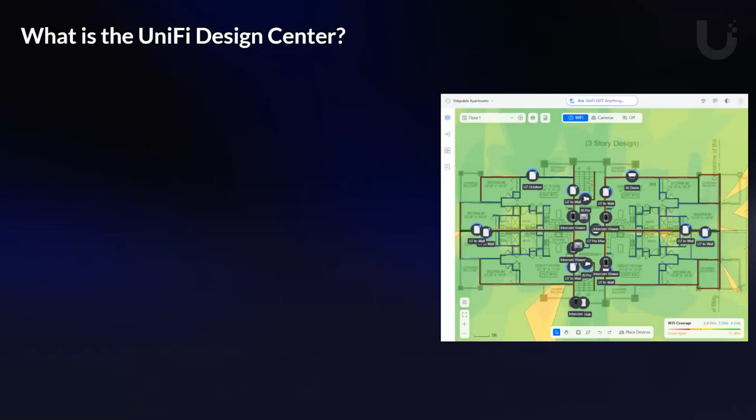So let's move on now. Design Center - what is the Design Center? It's a really powerful solution that allows you to do a lot of different things. The big thing you'll be doing here is designing your UniFi deployments, including the categories we mentioned, like UniFi Network with access points, switches, gateways, UniFi Protect with our cameras, UniFi Access with our door access control solution, and so on.

All of our products you can place and design on a floor plan to get an idea of what to expect before you deploy them. This allows you to simulate device performance and coverage on a real floor plan.

This is a great opportunity whenever you're getting ready to do a new deployment with UniFi and trying to decide between different units. Take a look at the floor plan, see how a different access point model affects your coverage, see what it looks like to have a 10 gig LAN infrastructure as opposed to a 2.5 gig. Try these different things out, test them out.

You can use this tool to get an idea of how it's going to work out. You can also visualize things like camera angles, which we'll show you in a little bit, and that sort of thing. You can build a bill of materials for your customer deployments or for your own deployments.

You can take that bill of materials, go to FlyTech and say, hey, we want to order these products - what of these do you have in stock? Do you have any alternatives for those you don't have in stock? You can provide that to them.

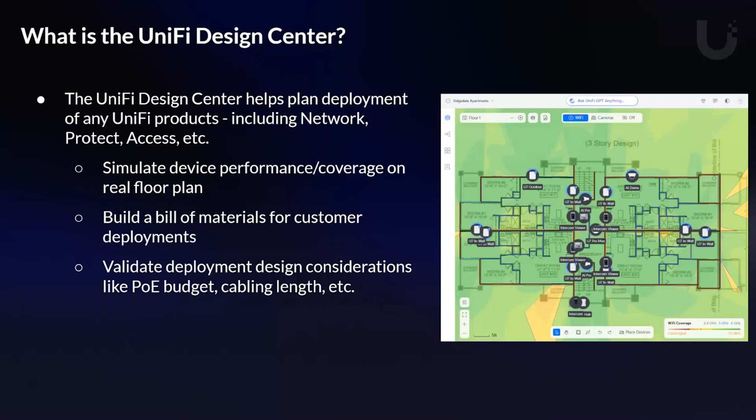You can also validate deployment concerns, like whether you have enough PoE budget for all your devices. We automatically check that through this product, and it's a good way for you to get a sanity check. A lot of times that's what people want from my pre-sales assistance - to just take a look over a deployment and make sure it's going to work out all right. What's great about this tool is it allows you to do that automatically with its help.

You can also generate your own sales proposal. There's an option to export a PDF where you can take this and give it to a customer, show them - or maybe if it's for your home, present it to your wife or husband to get approval for the deployment.

This nicely outlines what the deployment's going to look like topology-wise, the ports that are going to be plugged into what. It gives you lots of information - in just 15 minutes you can generate a full sales report with all the bill of materials, a generated topology, simulated coverage, and all of that with your own branding on it.

It's pretty amazing - you can do that in like 15 minutes at no cost. That's just a good way for you to show you're doing your due diligence to your customers. So I think if you use the Design Center, I'm confident you'll have better success at selling UniFi products, whoever it is you're selling to.

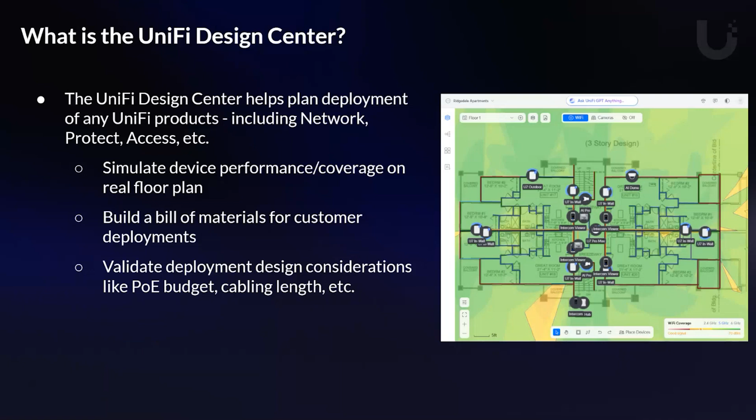So let's go on. Let's talk about how to get started. If you guys want to follow along, I'm going to be going through a demo in a minute, but I'll do a few slides first to show you the different capabilities, and then we'll do our own real-time Design Center deployment example.

If you go to design.ui.com, that's where the Design Center is, and you can log in with your Ubiquiti account. What's cool about this is you can actually use it for collaboration.

If you have colleagues at your company that you work together with on UniFi deployments, you can invite them to each project as a collaborator. You can share these floor plans with your customer, and they can make changes to this proposed layout and update you that way. It's really geared towards collaboration, and we want you to use it however you need to be successful.

If you start at the Design Center, design.ui.com, you can save your designs and keep everything that you're working on. So even if you close out of the window or forget what you're working on, like I always do when I get too many tabs and forget where I'm at, your design will save automatically and keep going. So when you need to come back to it tomorrow, it's there and waiting for you.

We know there's a huge range of office deployments. You might be a small business with 5 employees, or an office deployment with 500 employees. UniFi can handle all of that, no problem. But each of these deployments is going to look quite a bit different, and so these templates are just basic examples that show you what you could use. Of course, you can feel free to start with that and modify it to your heart's content, do whatever you want to shape it to your needs.

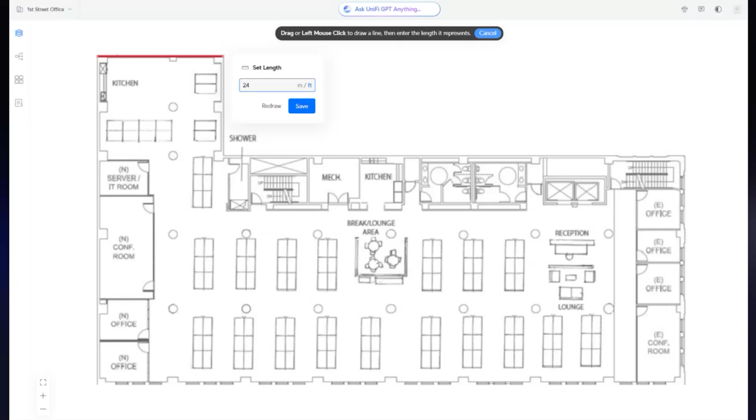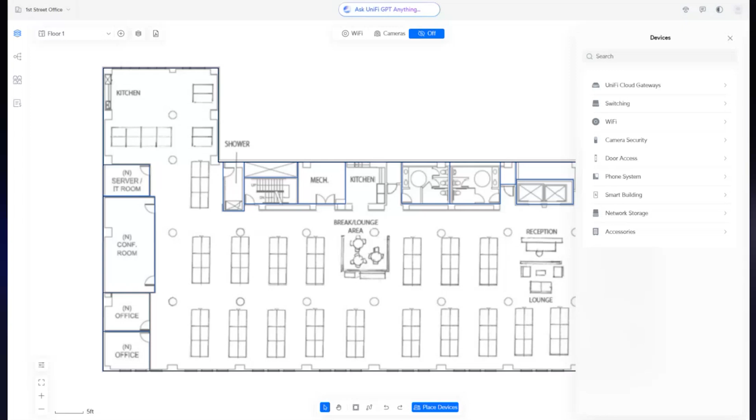So once you've done that, you can draw your walls. In this case, I went ahead and drew concrete walls throughout the exterior of the building. Then we have this feature where you can draw individual rooms. It's really quick. I did this in about a minute and a half to draw the walls I'd need on a floor plan. Once you get the hang of it, it's very simple and easy to do. I'll show you how it works in real time.

Once we've drawn those walls, you can see here I can place the access points. Based on the materials we specify these walls are made of—typically in a US environment, which I think most people are representing based on time zone—most interior rooms are made up of drywall, and exterior can vary: sometimes stone, sometimes concrete, sometimes brick. We've got the ability to draw the walls and specify the materials so it actually simulates how much signal will be lost through each of these different materials.

So if you have large concrete pillars inside a deployment, like in a museum, you can draw those, indicate they're concrete, and get an actual simulated effect of how much that's blocking signal for the access points on one side. What does it do to the signal on the other side? We simulate that, so be as precise as you can with the composition materials.

Things like doors—doors are wood, and wood and drywall typically have a pretty similar impact on Wi-Fi, a very marginal difference. So a lot of times, if you're worried about drawing every single door in wood, don't worry about that. The other thing is, if you're going to have exterior coverage outside the building, you can draw the windows there. But in a lot of cases that's not worth it if you're not focused on that outdoor area. So if you're not worried about outdoor coverage, just draw the walls and ignore the windows. But you can always add that if you want more precision.

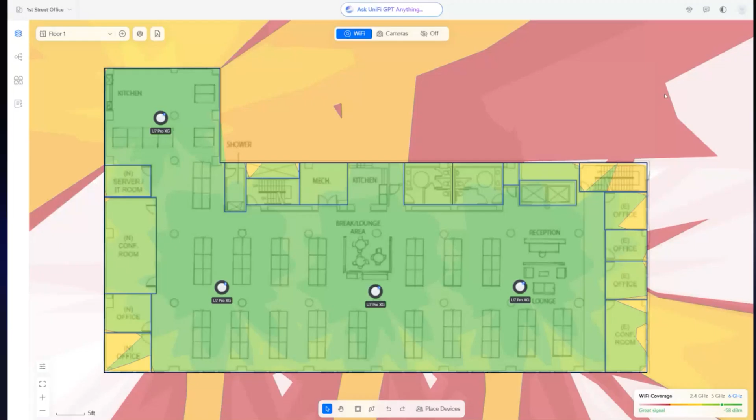We can also draw. A cool thing about this, you can actually use this tool to help simulate and estimate the cable length. This is an important consideration when you're deploying in like a larger deployment. Area wise, sometimes you have to consider that there's a maximum cable length depending on which PoE that you're using and everything. There's a maximum cable length that you need to make sure that your device is, you're not wiring too far from a PoE port.

That's not going to work. You need to make sure that you know what the limits are based on the PoE type and everything. But you can actually estimate your cable lengths, and you can also estimate how much cable you need if you're going to be running all new cables for new construction. You can use this tool to automatically draw cable connections from the switch rack all the way to all the different devices where they're mounted.

The cool thing is you can draw on this. You can select, if you go click draw cables, it's that little icon on the bottom. It looks like a little connector with 2 different nodes on it. That you can draw cable routes, which, let's say where the conduit is through your building. Some floor plans will show that. So if you have that information, make sure that you put that onto your floor plan.

Make sure it's accurate. This obviously isn't what it's going to look like in real life, but once you've drawn this conduit, you know what the conduit looks like. You can then go ahead and auto draw the cables, and it will automatically, using that conduit to route the cables through, tie every cable in and provide an estimated cable length from that switch rack all the way to that access point or to that camera. Really nice feature, and it allows you to estimate how much cabling you're going to need.

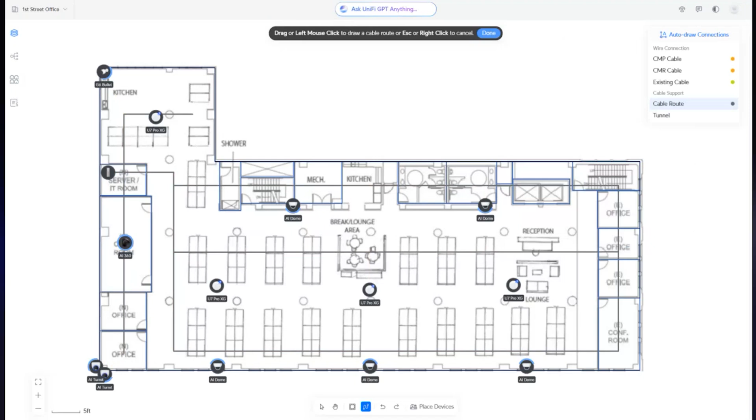Let me show you what it looks like once you've done auto draw. You can click that auto draw with connections button in the top right, and then it automatically draws that connection from that center server rack that I placed, and through all that conduit, it's drawing all the cables from each of those devices back to the switch. You can see here what the run is for each one of these down to the foot. I've got 107 foot from this U7 Pro XG all the way back to the switch. This is a great way for you to get a better estimate of how much cable you're going to need. Like if you're just guessing, it's going to be tough to guess that.

I do recommend calculating that and having a good understanding, but also know there needs to be some room for error, because in every real world environment there's going to be logistical issues, maybe something obstructing the cable where you have to route it around something to conceal it, and that adds some length. So just use this as a baseline and be conservative, get enough cabling.

So you don't get to site and cable everything, then realize you're short by a few hundred feet. But yeah, that's a really nice resource this tool provides. You do the auto draw, and it's going to save you a lot of time versus actually manually clicking and connecting it all.

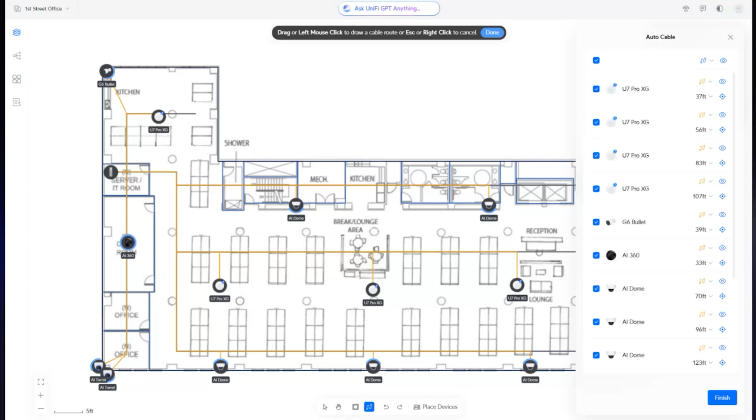Now, like I mentioned, you can actually place a rack cabinet on your floor plan. So in this case, there's an actual server IT room on this office floor plan. I can place the rack there, specify what size rack it is, and fill it up with all the different UniFi devices I'm going to be deploying, even down to having Keystone patch panels there to help visualize what this looks like.

What's cool about this - let's say you're planning a deployment as part of your MSP business, but you have an installer doing the job for you, maybe a new installer you're working with, and you want to make sure they understand your vision. Instead of describing this all, you can send an installer link that provides them an actual display of the rack, including which port goes to which device, and everything an installer needs to make sure everything goes to plan when they're on site. This is a really nice resource and something I do recommend you take advantage of.

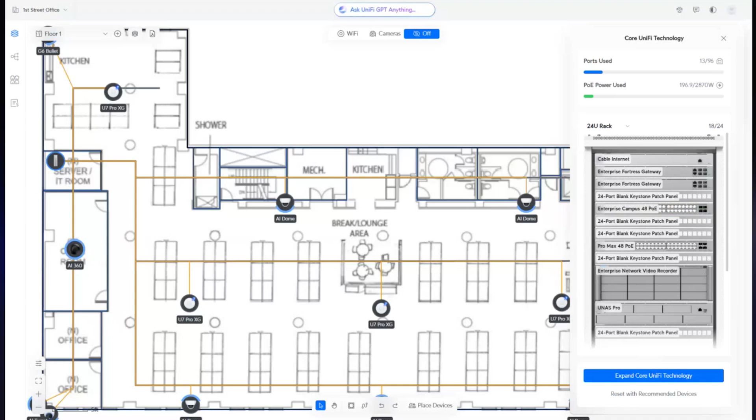Now, we also generate a topology as part of this. So you can automatically generate topologies when you're drawing your devices. As you're placing devices, you can actually adjust the topology to make sure all the cables are plugged into the right port and everything - you can adjust this after the fact. Where this is a really nice thing is if you're going to give that installer link, you see there in the top left, share installer link.

It allows me to enter an email address of an installer. It then will provide them that list of all the ports and which go into each device. And if I've fine-tuned that to make sure every port's what I want it to be, then we have a reasonable expectation that we can achieve that. And when you need to go on site in the future to service it, you can have some confidence that they'll have installed it properly based on the plans. This is a great resource to help facilitate that communication.

Like I said, here you can go into the devices and change the ports here. So what I did here is automatic, but sometimes it's not going to be perfect. It's not always going to recognize that a 10 gig interface device, like our U7 Pro XG, has a 10 gigabit Ethernet interface on it, and this Enterprise Campus 48 switch has a mixture of 2.5 gig ports and 10 gig ports.

Now, automatically, if I just auto draw it, it might not always put them on the 10 gig switch ports, but you can adjust that here on this view. Click on the port next to the device and change it to one of the 10 gig ports. As you can see here, those 4 ports in the middle are the 10 gig ports it's connected to, and this allows you to specify exactly which SFP port you want connected to which switch and so on.

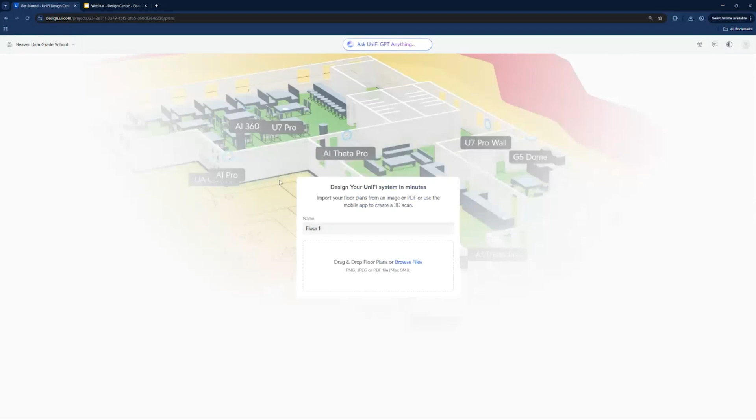And so this takes us to this screen where I can upload a floor plan. I'm gonna go ahead and upload the floor plan that I found today just Googling floor plans, and I'm gonna use this as a starting point. So this is not a perfect floor plan. Of course, I would recommend getting something that's more accurate, feasibly. Looks like this was maybe drawn over a physical map, but it works for what we're going to do today.

So what I mentioned today, if we know the dimensions of one of the walls, so let's say we know that this wall here is 50 feet, we can go ahead and draw that scale, and now we can see there the scale listed, so we can get an idea of what's the distance between each location.

Now, once I've done that, the next step would be going ahead and drawing the walls. I'll click down here on the Draw Walls button, and let's just say that the school is all concrete exterior. You can see here the effect that this has on the signal strength, so this is going to cause a degradation of the signal. Concrete is the hardest to penetrate. However thick that concrete is going to influence this, but this is our base estimate based on real world uses.

But what we'll do now is we can go ahead and draw. Now we have two options when we do walls: we can either draw an individual wall or we can do a room. If you have a lot of individual rooms, this is a good way to go, especially for interior walls. When you have something that doesn't really just follow a box format, I recommend just doing individual walls this way. So we can start by drawing these walls.

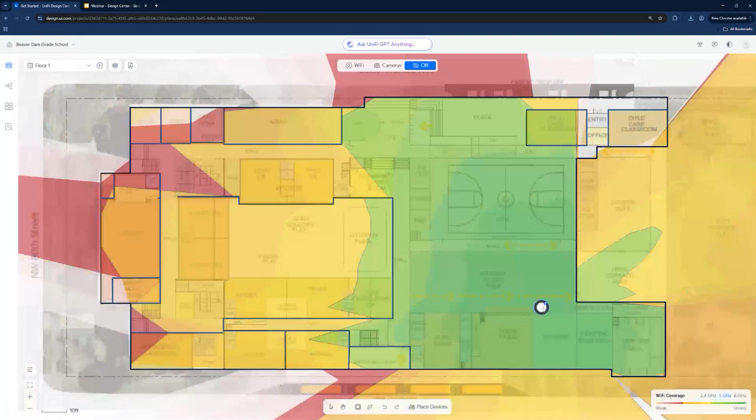Let's go ahead and start placing access points here. You can see this is based on 5 gigahertz. If I switch to 6 gigahertz - let's go to Wi-Fi and change it - we can get an idea of how these devices perform differently.

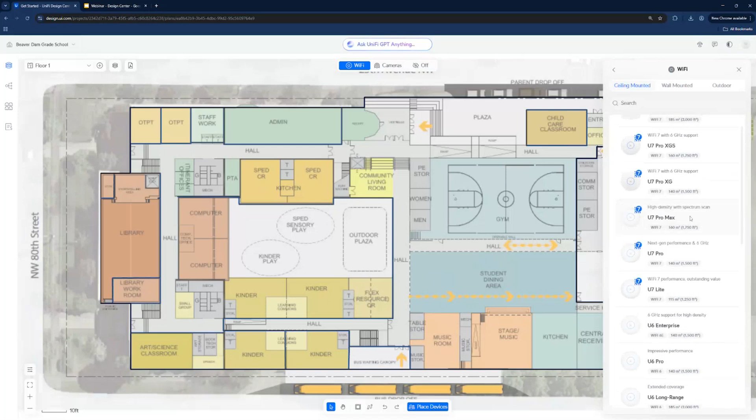Let's place, as an example, one of our older access points. It doesn't have 6 gigahertz, so it's not going to show up anything on 6 gigahertz, right? For our products that do support 6 gigahertz, like our E7, these actually support longer range coverage, but you can compare that to our U7 Pro for what you'd need for a school this size.

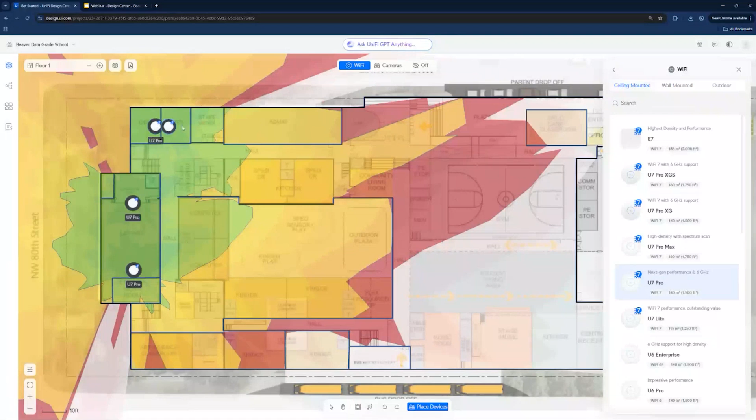In this case, maybe for the library we'd want 2 access points, depending on how many students will be there. You can use this to get an idea of how many access points you need as a baseline, and then if you get on site, have room in your budget for a few additional access points to fill in areas with weaker coverage.

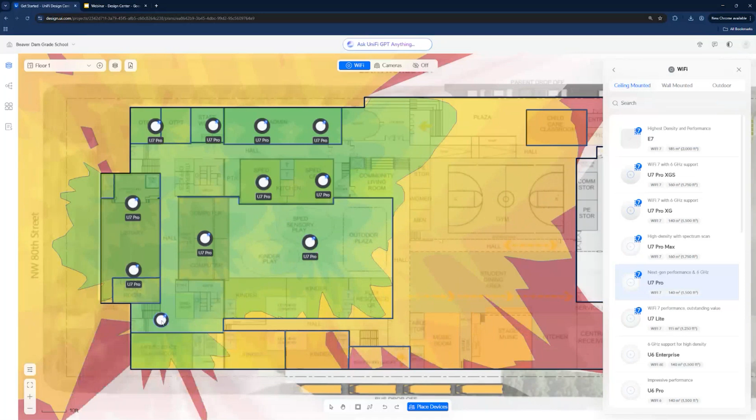Even for a larger school, it scales pretty well. I don't have all the walls drawn, but there's not a whole lot of interference from drywall only - you will definitely see that with concrete. Look at that when I put it right on the other side of that wall - look how little signal is coming through that concrete.

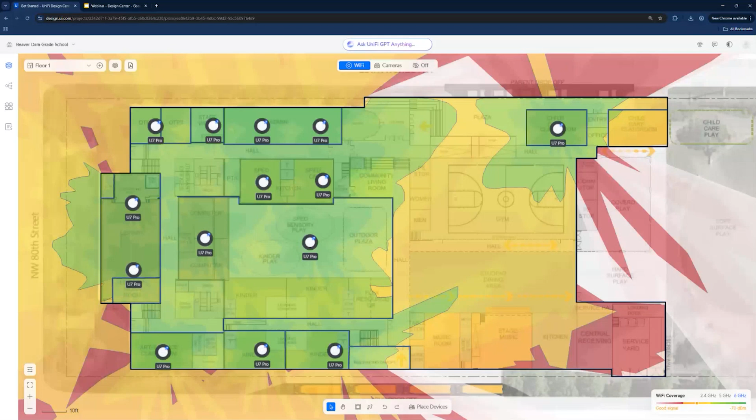If you want to see the scale, you can highlight each of these areas and it will show on the meter what the signal strength is actually like. Minus 70 dBm is still good enough for a connection, but we recommend designing generally around green signals, especially for 6 gigahertz, since coverage also depends on the client device and how strong it's able to transmit. That's how we can quickly place devices and get an idea of how many APs we need.

So if we want to see how many we need for this whole deployment, let's keep going through here. Maybe we don't need to worry about the gym area, because no one needs to be on their phone while playing basketball.

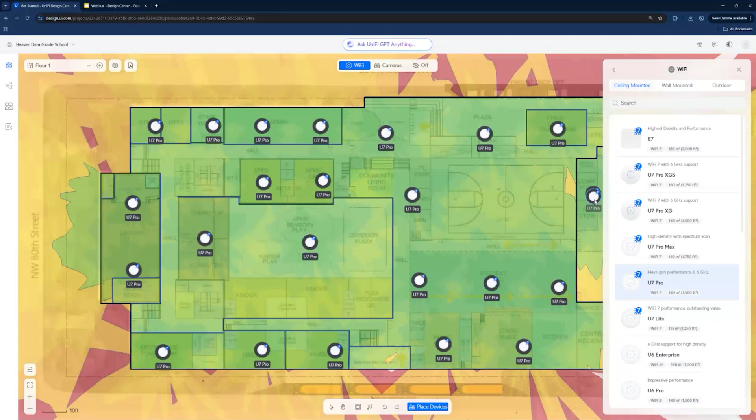All right, so we won't prioritize that. But you can get a pretty good idea of how many access points you need, and then use this as a base bill of materials that you can modify based on real life conditions.

Let me show you an example of how the E7 does long range 6 gigahertz. You can see here how much more coverage you get from using the E7 with 6 gigahertz, because it supports the longer range 6 gigahertz, making it more similar to 5 gigahertz in coverage. Normally 6 gigahertz coverage is smaller.

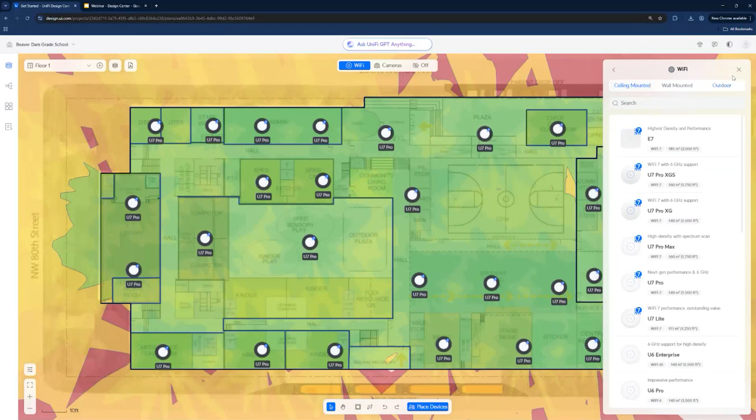But let's look at 5 gigahertz. You can see here there's definitely plenty of signal. And 2.4 gigahertz is going to be pretty noisy. Like I mentioned earlier, I recommend for a school like this that you disable 2.4 on at least half of the APs, if not more, maybe two thirds of them. You want to make sure there's good enough quality and minimal interference so devices can still connect, while prioritizing 5 or 6 gigahertz for all the laptops and the more recent and current client devices.

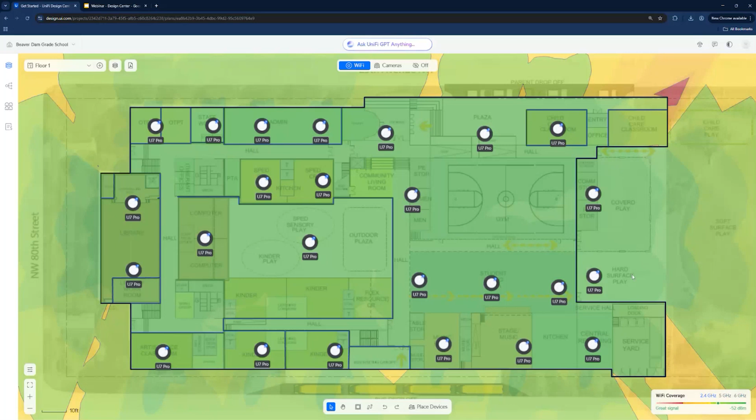All right, so that's the Wi-Fi. Now let me show you how the cameras work here too. This is a cool thing that we can do. If you're planning on deploying cameras and want to see what the different coverage would be like for each of the camera models, you can look through all of our cameras.

Now we've got them separated into bullet form factor, which you'll recognize here. We just released the G6 Bullet, which is a good scalable 4K camera with AI and everything on it. It's a good value for a school. If you're going to have a lot of cameras, it's going to be a pretty good price point.

But think about the hallways here, what device you want deployed in the hallways and how you want them deployed. A lot of times people will deploy something like this when they need more coverage, or when they'll want a wider angle lens, like our AI 360.

You can see here it covers a pretty large area, like somewhere like a gym or something like that. So that's a pretty high coverage.

Whereas let's go with the AI dome. What this is going to do is, within that angle, it's going to provide coverage of all this. But you can see here it only goes as far as the walls. So you draw these walls on the floor plan and you get a really good estimate of what the coverage is going to look like and how many of these you're going to need.

But for the outdoor, you can see here we can place these devices outdoors, and these are weatherproof and so on. So we can use the G6 turrets if we want to have these for the exterior of the building.

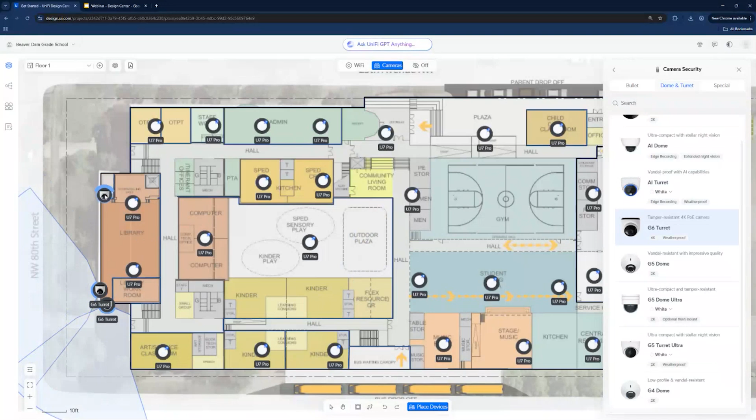You can also see how we sell different mounts where you have these mounted back to back, where you can have two of them mounted like this. Then you get more coverage, and it's just as simple as adjusting it this way to change the orientation of that camera. By having two of these mounted next to each other with different facing directions, you get full coverage of everything going on out there.

So just check out the different camera options that are there and get a feel for how each one of these works. Like the G4 PTZ Industrial is going to have a lot of coverage. It has 22x zoom too, so in reality it's going to depend on where it's pointed. It's not going to be able to point at everything at one time, but you can point it in any direction, and it's able to do and follow movement and things like that.

But we have all our models there. Now if we select Wi-Fi, we can switch seamlessly to cameras. And when we have the walls drawn here, for the indoor models, I recommend using in a school or something like this a good example that's really scalable and cost effective, which would be these Dome Ultras. They're small devices, and they cost $129 each.

So it's a good, cost-effective solution for a larger deployment. In all your hallways, periodically you have one of these facing opposite directions every so often, and that will provide full coverage of the whole facility. But yeah, that's how you use the camera overview.

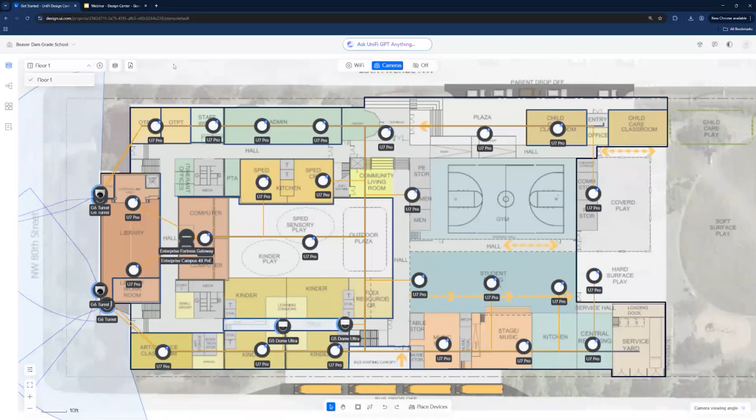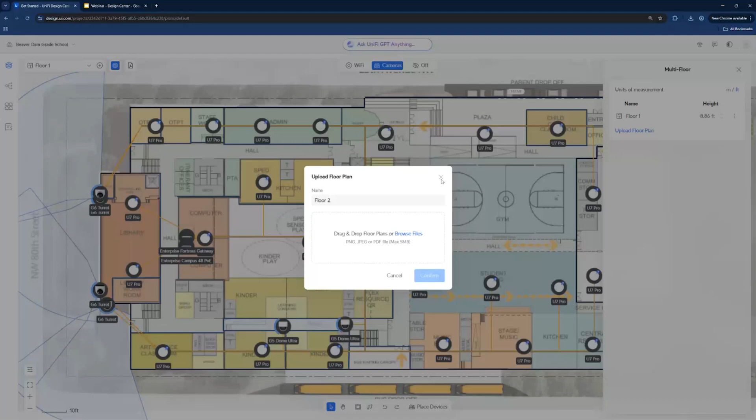And then we mentioned multi-floor. All we have to do for multi-floors is go ahead—you see where it says the multi-floor button here—you can just go ahead and add another floor. You can actually duplicate, for some apartments. Sometimes you're going to have an apartment layout—let me show you an example. This apartment layout, you might have all the floors be the same layout, in which case you can just duplicate and go in between the floors here to each of the different floors.

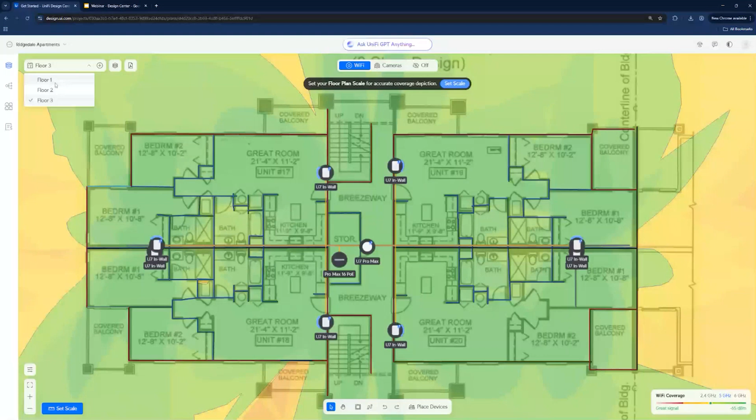And that's how you get to manage the multi-floors. You can specify the roof height, which in the past we had tied to the actual coverage, because of course you're mounted at a certain height. This is something you're going to consider right now. If you're deploying this in a warehouse and your AP is mounted 40 feet up in the air, it's going to be a different coverage than if it's mounted 8 feet in the air. So you need to make sure you're adjusting this.

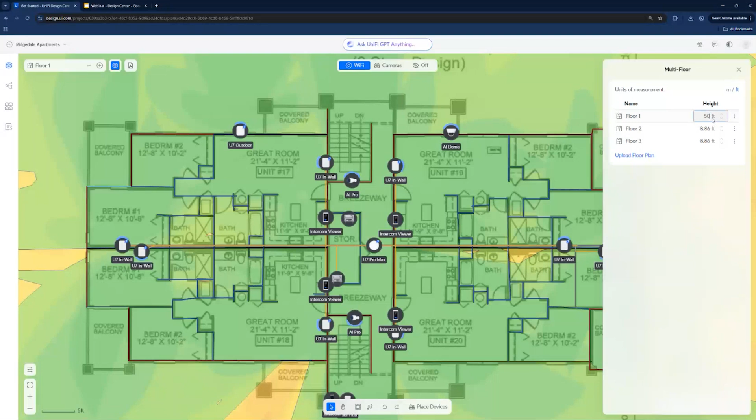I think previously it worked like this, but we'll have this in the future to where it's going to adjust. You can see it does adjust somewhat based on this. I think you can see there are some adjustments made there, but there's some improvements that could still be needed, maybe it needs to be a little more accurate. In any case, just make sure to check this when you're adjusting height. It does look like it's working properly, so maybe they already fixed it.

You can change the ceiling height, and that's going to change and impact the coverage of the devices. But when you're doing a warehouse, just make sure to think about that, how it's going to impact things if you're mounting really high in the air, and make sure to double check that information.

But here you can specify the height of every floor and how tall it is. And then from the topology view, you can see this has got all the floors. Currently I think you can go into the port view, and then make adjustments here between these devices. But I don't think right now, to answer your question about multi-floor, it's currently functional automatically yet. It looks like we need to improve that, but hopefully we'll have some fixes on that in the near future.

But we're adding a ton of stuff here. We've got some really cool things coming in the future too. So we just added the share installer link here.

We're going to be adding the ability to basically simulate a deployment too. We're going to be bringing a demo simulator. I don't know if any of you guys remember when we used to have demo.ui.com. I loved that website, it was really cool. We had an actual sandbox environment where you could test out the software experience. We're working on putting together an ability to simulate individual designs in a software experience, so you get an idea of what the software would be like to manage it from what you've put into the design tool. So look for something like that in the future. We're working on that, and hopefully we'll have something there before too long.

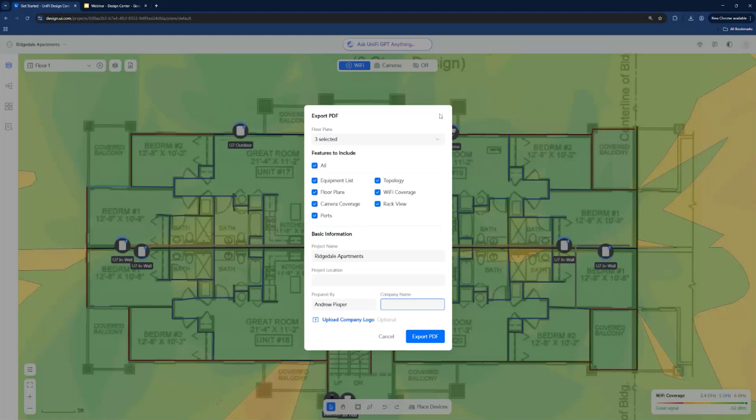I expect it will in the future, but there you go. Cool, I think that provides a pretty good overview.

What I mentioned before is you can actually put any of our products out there, including our UNAS Pro, which is our network storage device. We have things like EV stations, you can go ahead and place these EV station chargers out in a parking lot if you want to, and connect those back to the switches.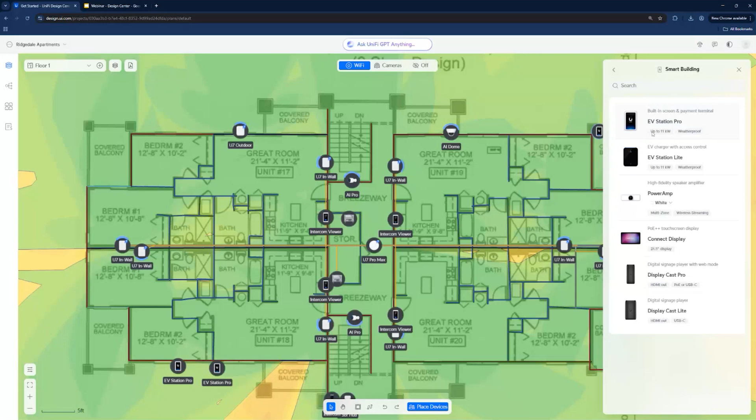What's cool about the rack view here, like I mentioned earlier, is this does provide a check on your PoE power to make sure you have enough to connect all these devices. It's a nice way to do a sanity check, making sure you're not exceeding the amount of power your devices require. And we'll give you an indicator if you do exceed that.

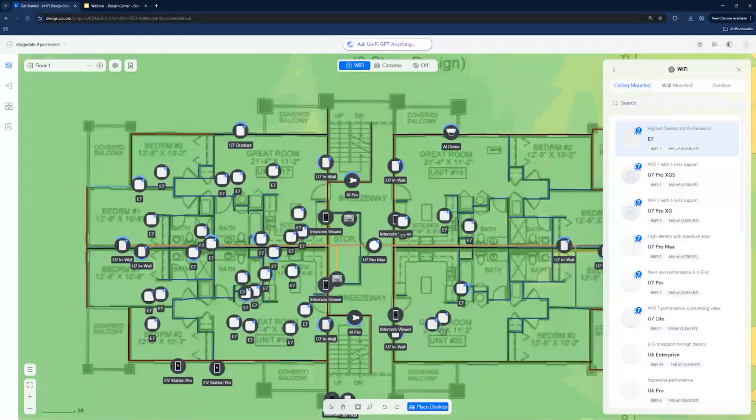So if I go place, let's see what I have here, let's go ahead and start placing a bunch of devices. This stuff can handle a pretty good scale here, so we're taxing it a little bit right now. Let's see what we can do.

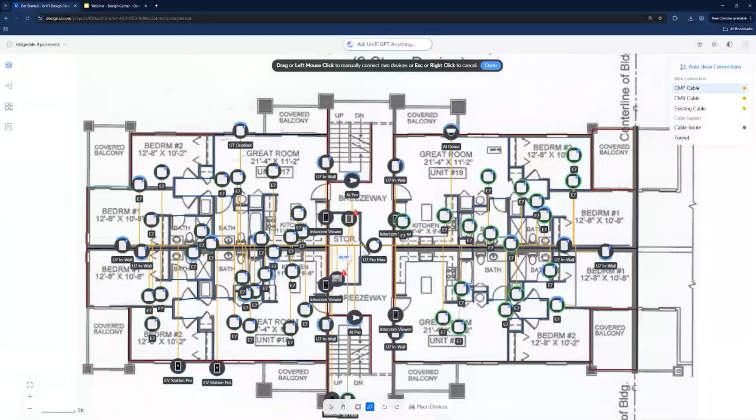Let's go ahead and do auto draw the cables. And you see here now we've got an error indicator, you've exceeded the power output on this rack. So I'm going to select back here, and I can go ahead and get more information. I click select on the info here, and you can see I'm at 1249 watts used out of 760 available wattage.

So that's going to help you troubleshoot an issue. What that would mean for me is I need to change my switch model to be able to support all of that. So let's go ahead and switch this out.

Let's throw in a few, provide some other products here, the whole list of them. In this case, you can see the wattage here, so if we need more wattage, there we go, we add that, and now we're within our wattage allocation because it can handle quite a bit of power. But there you go, that's our design tool.

Any questions for me now that we're in this? I'm happy to answer any other questions that you have.

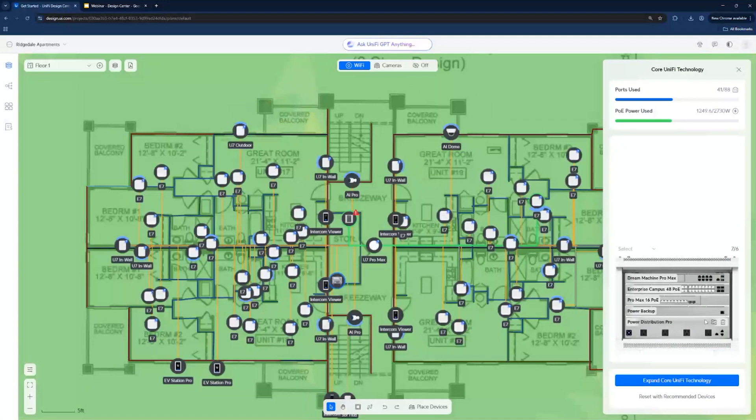Somebody asked if you can put a UNVR in the design center, Andrew. Yes, you can. What you'll do is go in here to the rack, go into your settings, and now I'm going to change this to be a 42U rack because then I'll have a lot more room, and I can go ahead and add a device. Go to network video recorder, and then I've got our UNVR, the NVR Pro, or the ENVR there. You see, I can go ahead and add that in.

Somebody is saying, I would like to have, I guess it's a future request, when you export the document to have the devices with numbers on it or the name you change it to. When I export it, it only shows the devices without the names. Can you do that, maybe for the future?

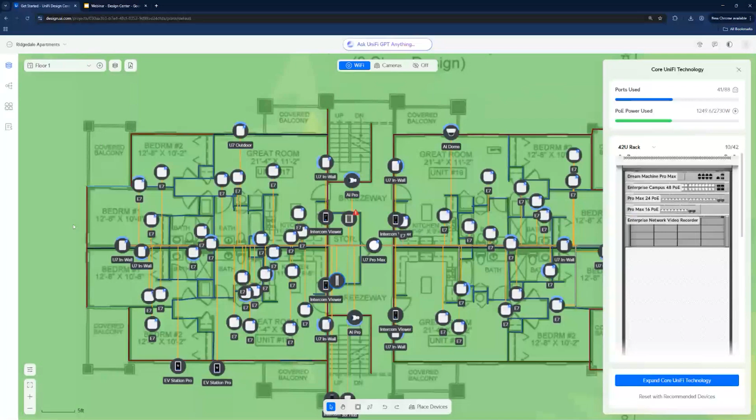Yeah, I'll note that. I do know you can use ports right here, but it's not quite the same. You want some sort of indicator or custom name that you can put on the device, like when you rename it here, you want it to show up as that in the export. I'll take your word that it's not showing up in the export, and I'll pass this off directly as a fix to our devs following our call today.

Okay, here's another interesting question. Is it generally better to install smaller access points and more of them, or a larger one and less quantity? That's a great question, every deployment is different. Wi-Fi is kind of my main area of expertise, so I'm glad you asked me a question about wireless. But basically, I think it depends on the application, and it also depends on what we talked about earlier, if we're talking about which Wi-Fi band these clients are relying on.

Let's take, for example, the warehouses I mentioned earlier. A lot of warehouses are very unique RF environments, very different than deploying in an office building. Because what's different about a warehouse is you have really high roofs or a high ceiling, long shelving, a lot of times 20-foot shelving, densely packed materials that can create more interference.

So a lot of times we design, and this gives you a unique kind of layout where people deploy access points with directional antennas that are specified. We offer APs with external antenna connectors, so if you're mounting at the ceiling, you can get an antenna with exactly the narrow beam width you want to fit down those aisles, long and skinny, and mount it there. That reaches through the aisle without bouncing off the shelving units like an omnidirectional would, especially with a lot of metal parts on those things. So that's a whole different deployment consideration based on coverage.

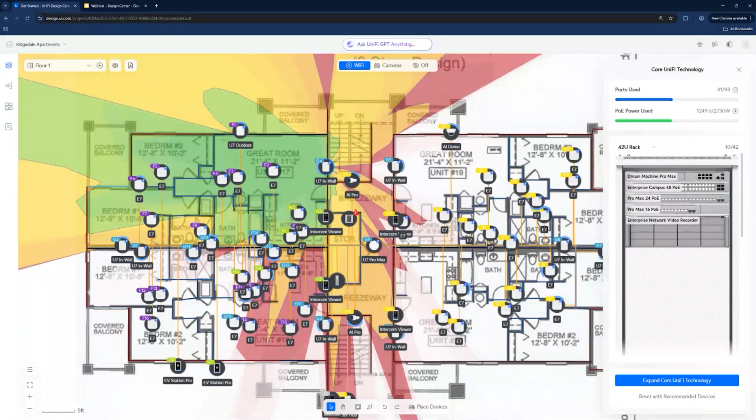That's the great thing about the access point model. Everybody used to have these wireless routers that tried to cover as much as they could. But now with an access point model, we can facilitate a really good roaming experience where everywhere you go throughout the whole large deployment, you have good signal throughout that building and get that automatic roaming experience if you fine tune the coverage.

So when it comes down to it, generally speaking, you want adequate coverage. But keep in mind 2.4 gigahertz is a different beast. You don't necessarily want to add more 2.4 gigahertz APs to improve performance, because a lot of times you'll create more problems than you solve by doing that. So just know what clients need. If you're focused on 6 gigahertz, it's definitely going to be more APs with smaller coverage cells.

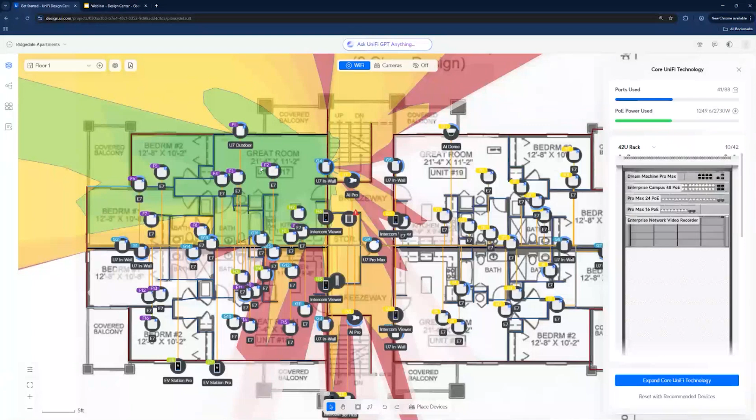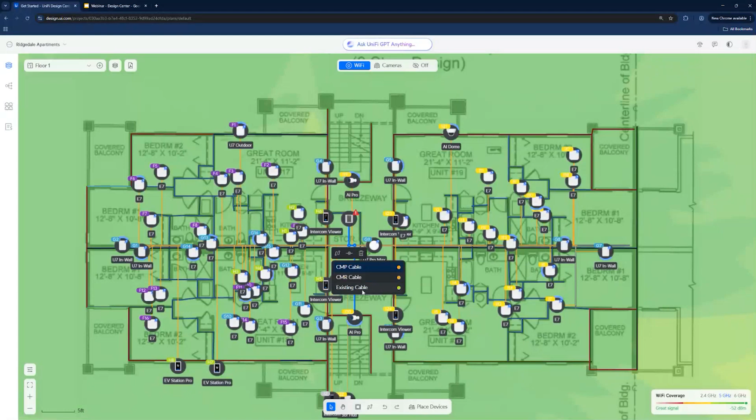The last question here: is it possible to change cable color in order to identify different networks like data, security, access? I think that's not currently possible now. We can change cable type here, from these two different options, we can change from CMP, CMR, and existing cable, but unfortunately it doesn't seem like it's going to allow any custom colors. That'll be another feature request I can recommend in the future.